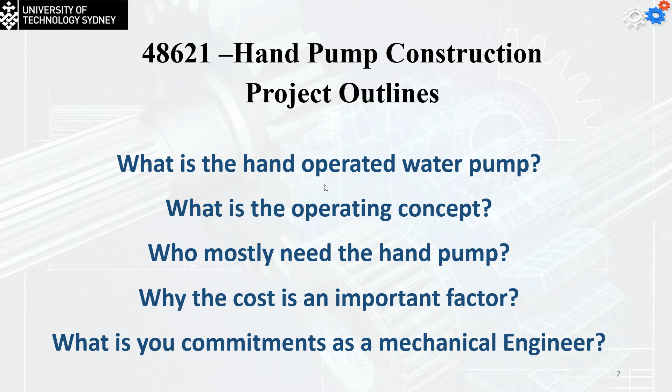And actually, the reservoir can be filled from tankers, can be filled from wells, but usually it's going to have fresh water, it's going to be covered, and this will protect the water from contamination due to the dust in the weather, or for example, from the heavy rains or the floods.

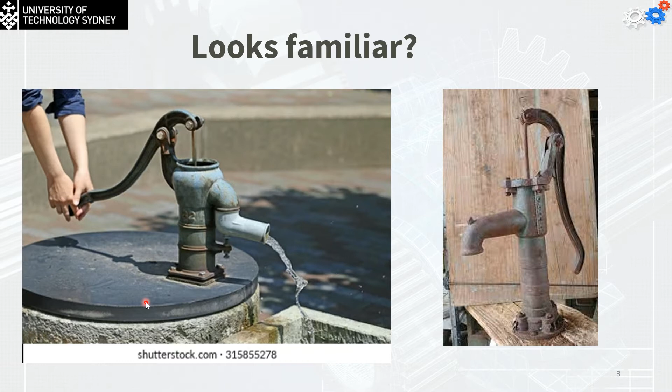Now, how the pump is working. All the pumps actually show the same principle of working. The working principle of the pump is the same, again, to have a pressure differential between the inlet and the outlets. So the positive displacement pump, like the one we see in this photo, we have the chamber between the two valves. As you can see here, this will be the chamber within the main bore of the pump.

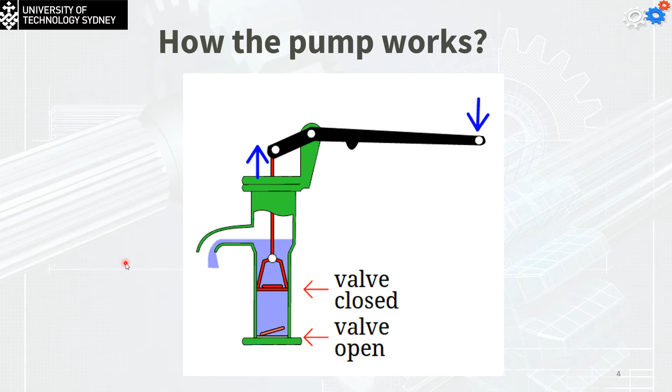And the piston movement is going to create a cyclic positive negative pressure that causes the water displacement between the inlet and the outlet through the pump main body, or what we call the bore. So you can see, we pull the pump shaft up to create a negative pressure that opens the foot valve and fills the chamber, and we press it down, positive pressure that opens the piston valve and fills the upper side or the main body of the pump. Almost all the pumps, even with different arrangements, are going to have the same principle of working.

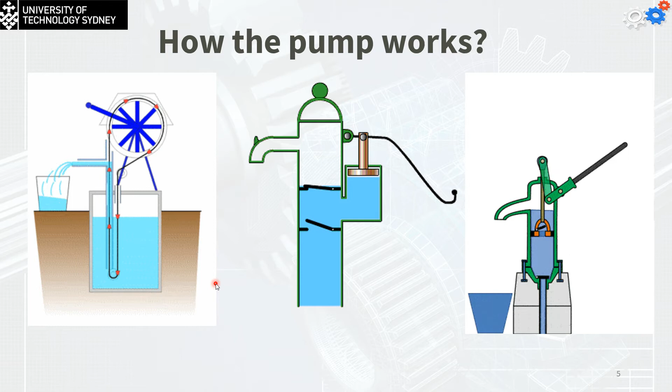Now, in your case for this semester, you can use different models and discuss the manufacturing process of it because we're not making something in the lab. So your first task is going to be the following. As a team, you are going to select your model or models. So make a search, select multiple models at the beginning, and then you have to do your analysis.

The analysis, after you make the selection of 2 or 3 models, is going to be based on the performance and the manufacturing processes of the pump parts. Then take a decision. The decision is going to be about which model you will adopt as your prime model, which model among the 2 or 3 models you selected to be your prime model to write the report. Next step is going to be to act as engineers.

Because you are engineers. Even if you are year one or year four, you are engineers. To start writing down your report, just consider that I, or the marker, am a client, and you are engineers and you've been assigned to make a project. So you have to start first with making sketches. Make the hand sketch for the parts and the assembly.

Hand sketch is very easy. I showed you this process earlier in one of the videos. Then do necessary modification for the design. If you think that it will be necessary to make this design simpler, you need to do that after having a discussion. The discussion between the team members is: can we simplify the parts to use less complicated and cost-efficient manufacturing processes?

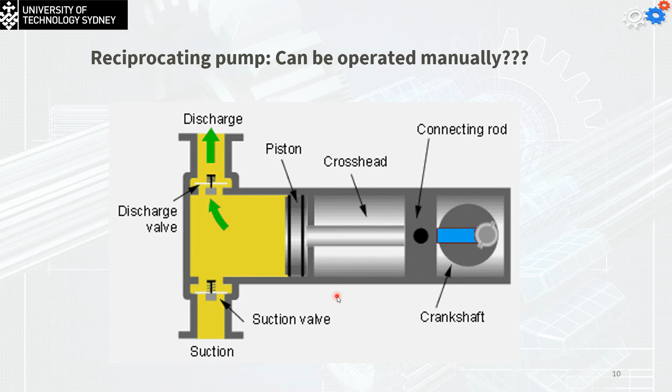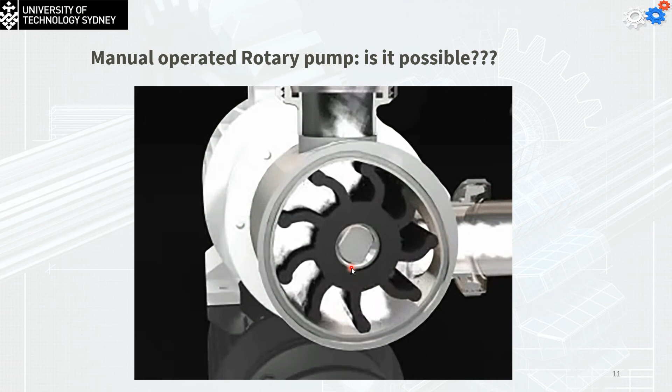Can we make a hand-operated rotary pump? This can be another question. More ideas to select your pump model. You can see that this will be a different design for the piston pump. The concept is going to be the same, but we're not going to have a movable valve on the piston. The valve is going to be on the side. This will be the plunger pump.

In the plunger pump, we're going to have the plunger to cause the positive pressure in this area by the compression down, or the negative one as it goes up. The concept is going to be the same, but instead of having the piston, which needs very high tolerances between it and the main body of the pump, simply we can replace that with a plunger. We can do research to find the design of this type.

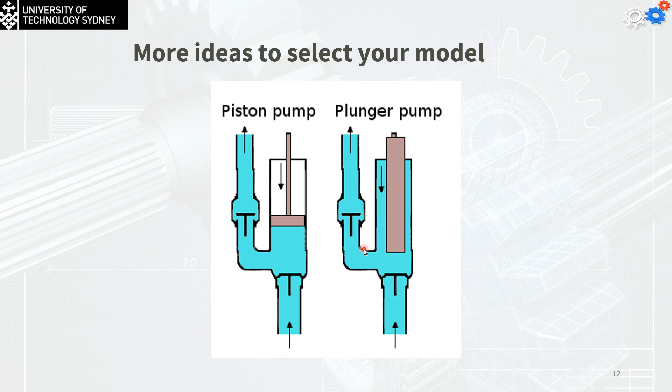I told you earlier about the shaftless pump. Now, the shaftless pump is only going to be a pipe which has the foot valve at the bottom. Now, you'll say this will be very easy to design. Yes, because we only have the foot valve, which is going to be mainly a ball valve. But just remember that this is not always going to be operated by bare hand.

Simply, we need to add something which we call the tube. I forgot the name of this device anyway. I will try to find the name and send it to you. So the design is going to be mainly for the bottom valve and also for the handle, which is going to move the tube vertically to do the pumping operation.

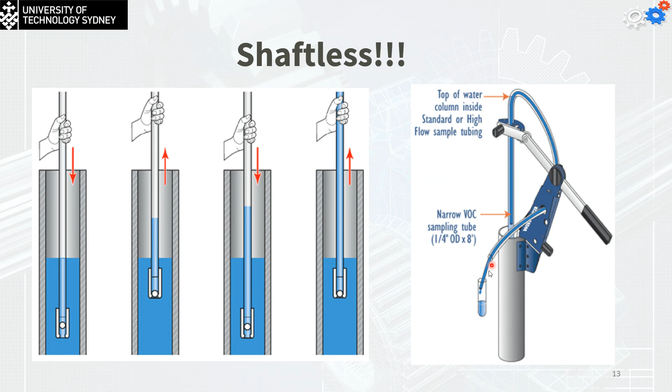I think that many of you use the water dispensing pump. Now, the principle of this one is just generating negative pressure as we take this one down and up. This will pull the water and fill the chamber here, and by pressing, it is going to pump the water to the outside. Now, the problem we have with this type of pump is that the head is quite low. The head is how high the water can travel vertically during this pumping operation.

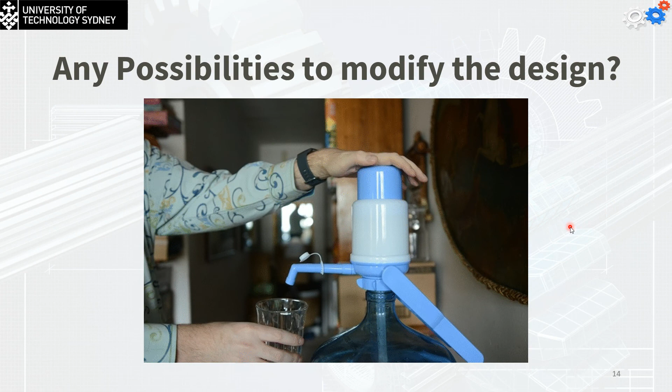Now, my question is, is there any possibility to modify this design to make it a big pump? You have to search that. Okay, so that's it. That's what we need to work on through the next 6 weeks, coming out with a report about the manufacturing processes for the hand pump. You are going to work in teams of maximum 3 students. You are going to nominate your team leader, and the team leader will assign the tasks to different students.

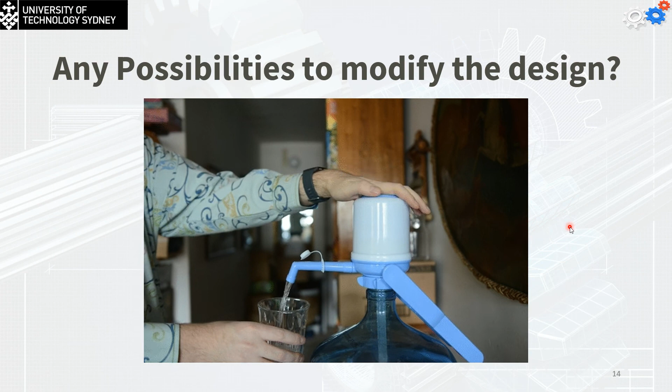For any help, you can contact me and your tutors, for example, with the critical thinking. This will be the most important thing. And also to gain more experience by asking questions on, for example, the CAD modeling of the part. You're not required to do any CAM analysis or CAM processes on the part.